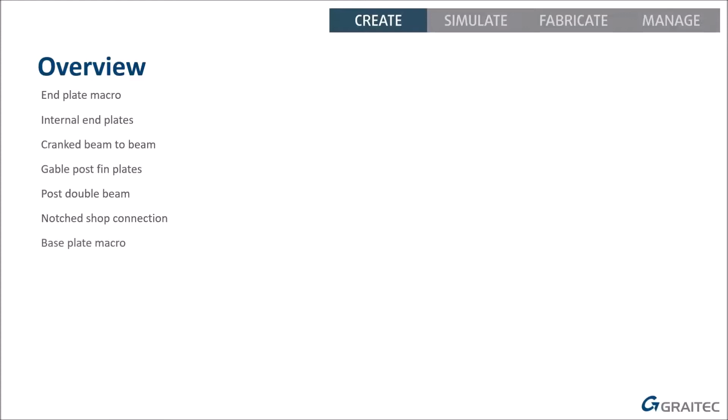I'll talk about the base plate macro. This one comes up quite a lot on our technical support. It's an end plate with bolts just to one side. And then finally, we'll look at what you guys could do with joint names and the propagate joint. So it is some hidden gems.

I have only got now 25 minutes, so we can't show everything, but hopefully you guys, although you're all experienced Advance Steel users, there might be a few bits and pieces that you'll pick up today. And I think this is a session that we can run again in the future, and we can look at other joints. And I will take any questions that you guys have at the end of the session.

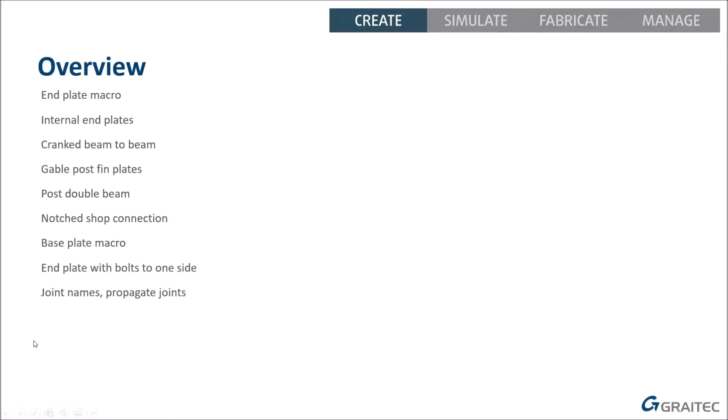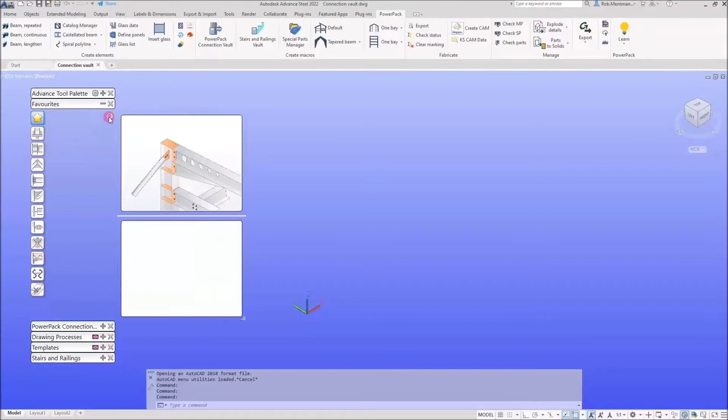Okay, so let's get cracking and actually look at some connections. Now like I said, we've only got half an hour in here. So first thing with your connection vault, you have this little arrow here. Now, if you're not sure what a connection will do for you, this will give you a preview.

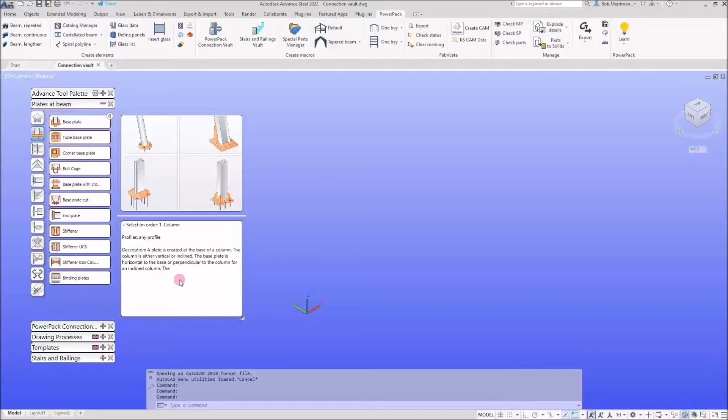And a description of how that connection works. If we look at the base plate, in here, for example, these are the options within the base plate itself, and then it will tell you what selection order you need to click things in, what profiles or what sections it works on, and then a brief description of what it's going to do. So very useful if you're not sure how a joint is going to work.

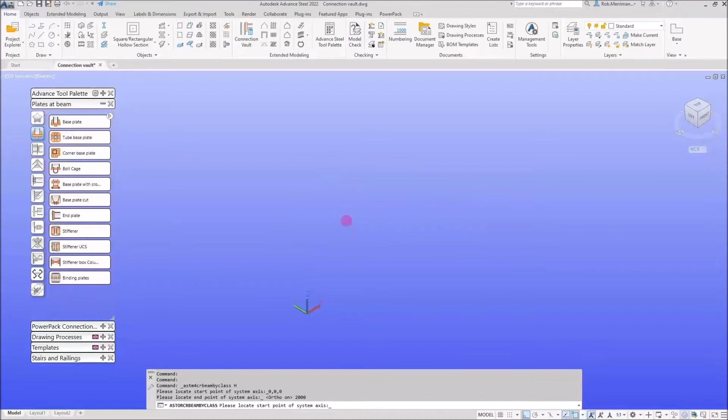I'm going to start with a couple of these you might already be aware of. We're going to start with the box section, and we'll make it, let's say, 2 meters. That will do. We'll zoom back in on that.

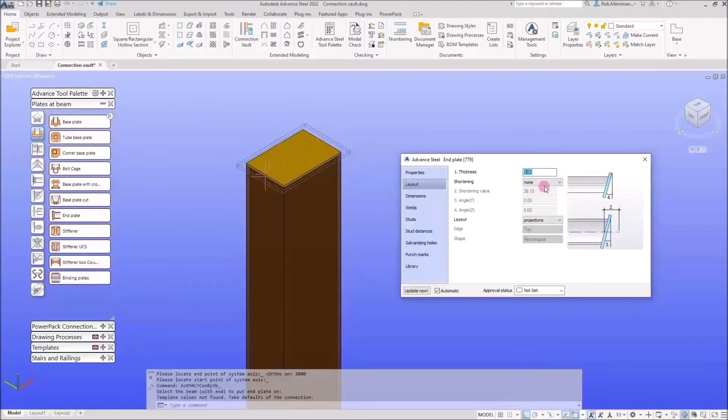Now, if we want a cap plate on the top of this box section, there is a macro in here called an end plate macro. Now, some people think, well, I can just quickly draw a plate by 2 points and put it on there. The things we can do within this joint, we can say, well, let's make that a 5mm end plate. Now, the shortening, I can say shorten by the plate thickness, so I can draw my sections at the correct length and put a 5mm cap, and it will shorten it automatically for me.

Then we're going to set our layout to projections. If I set that to 0 projections all round, that will give me a flush end plate. I could probably set this to a 6mm fillet weld all round.

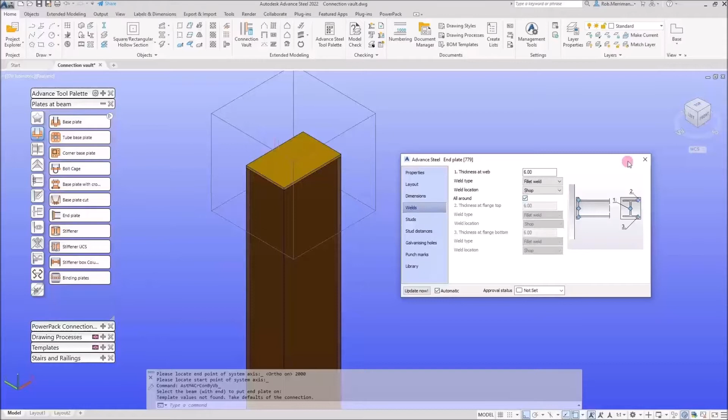Now, the benefit of using this joint over drawing it manually is if I then go and change the box section, or even if I change it completely to a square hollow section, and we change it to something like that, that joint's going to update itself automatically.

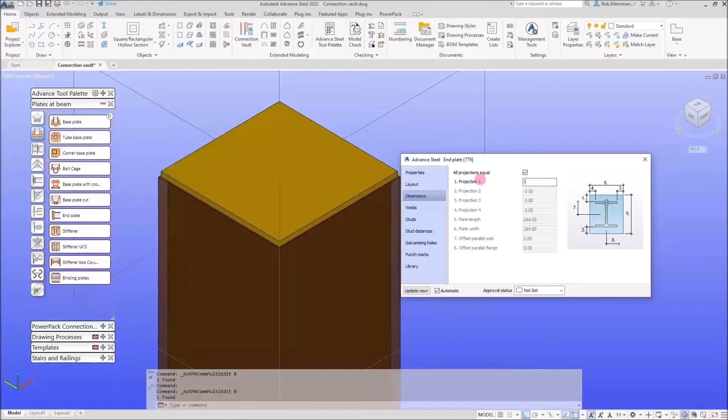Now, we might say, okay, well, fine, well, we need that to be a 10mm box section, and we actually want it brought in 3 or 4mm so we can just run a 3 or 4mm fillet weld around it. Well, that's fine. We can just say in the dimensions -3mm or -4mm. And again, that's going to save that information in there.

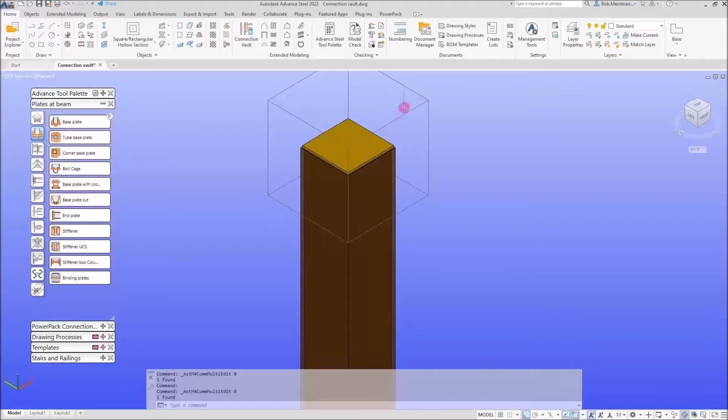So you might think that you can just, and there's nothing, you can obviously draw it as a plate, but putting this kind of information in will allow you to copy things around. We obviously can copy that around to different section sizes, and if something changes, then the plate will update itself automatically.

Now, some people want a plate inside the box section. So let's just make this something a bit smaller, 100 by 10. Now, what we can do instead, we can use this stiffener box column joint. Now, what this is looking at creating is a stiffener inside with backing plates and things.

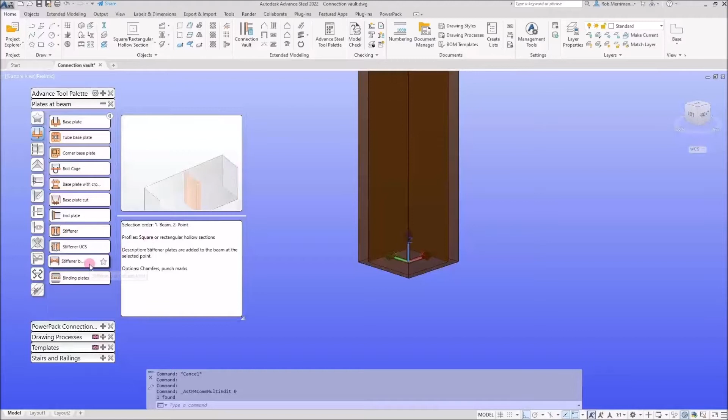So it seems like an odd one to use, but I'll put that in there. And it does look a little bit crazy to begin with. But what we can do for our backing bar settings, I can turn those to none. And we'll keep our plate thickness at 10mm. But what I can do in here, the plate gap, I can set that to say 0.5 or 1mm. For my plate corners, I can put a straight corner on there of, say, 8mm. It's going to be 10mm.

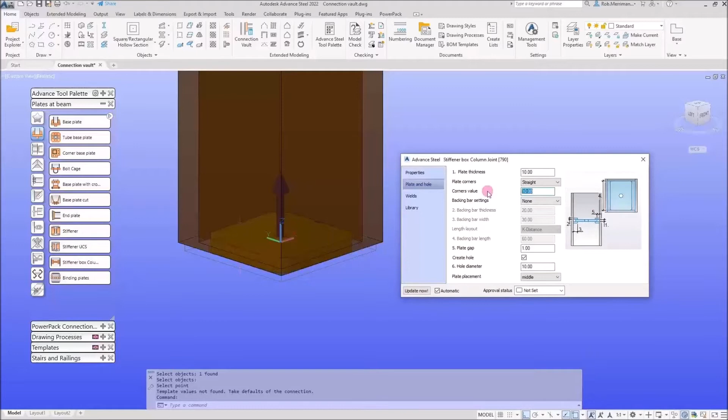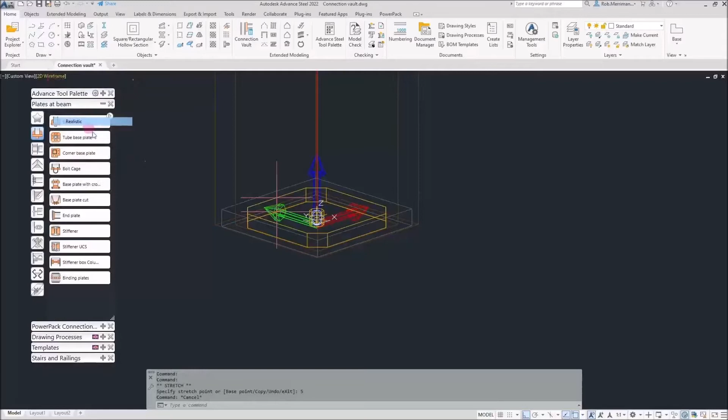And that then, if I want to bring that up so it's flush, I can just move this little grip point. So any joints that have this little sphere, this is where we're inserting a connection. So I can just drag that up and I can type 5mm, and that will, if we go back to a realistic view, that will give me my

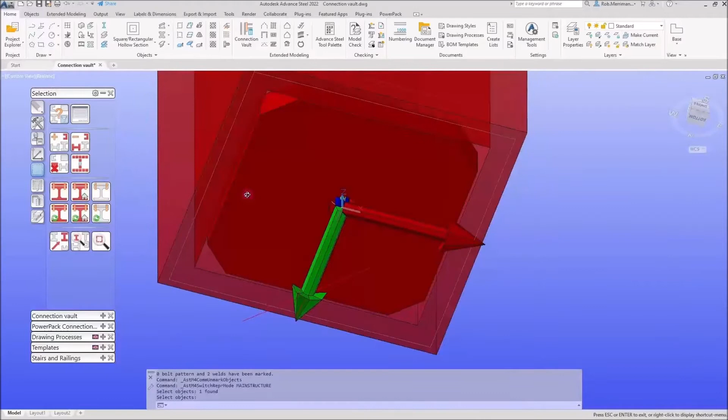internal cap plate with shoulders, with chamfers, and it's welded to the box section. So if we do a clear marking and show me what's attached in here, we can see that's welded automatically. So again, we could draw it manually, but again, if we change the size of that box section, that is going to update itself automatically.

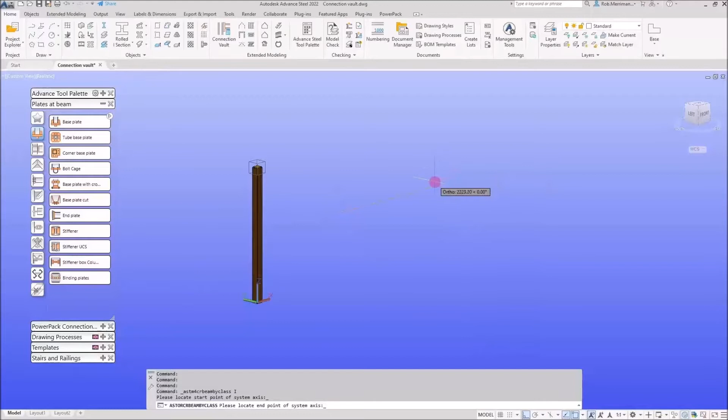Now, while we're looking at this tab, we'll very quickly go through this. Today's going to be a lot of me jumping about all over the place and putting some random things in.

We're going to use the stiffener macro. So you choose your beam object and you choose your location point. I'll just say it's going to be the midpoint in here. That's fine, that'll put a stiffener on for us.

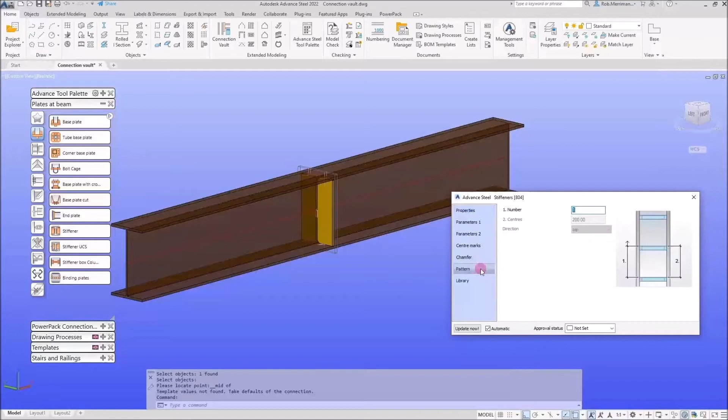One thing people don't always realise with some of these joints is that we can put a pattern in. So I can say I want 5 sets of stiffeners at 200, giving me a pattern of 5 in the direction of the top. Obviously bottom will go the other way, or both will give me my pattern in both directions at certain centres.

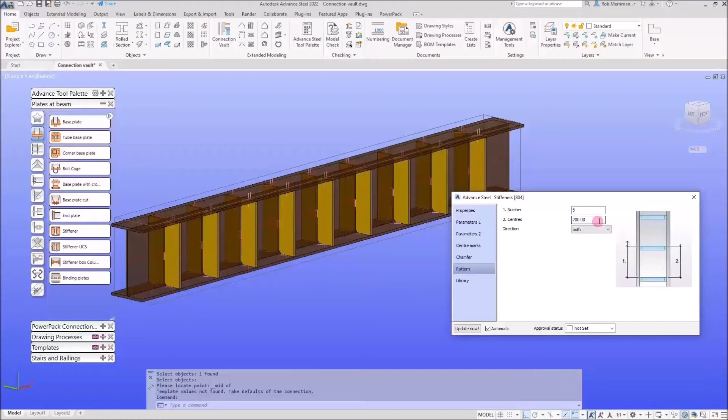So we can do that within the stiffener. We'll have a look at the beam end to end. What I'm going to show you is, let's just put a couple of beams in.

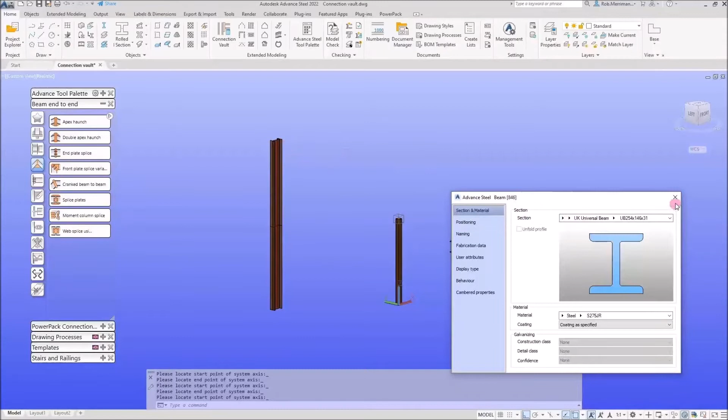Now, let's say we've got a bit of cranked roof steel work. We could obviously just miter these 2 beams, like so, and obviously we need to put a butt weld in.

Now, with that butt weld, it's got to be tested. It costs more to actually do the weld. You've got to test it, and we've got to fully test it.

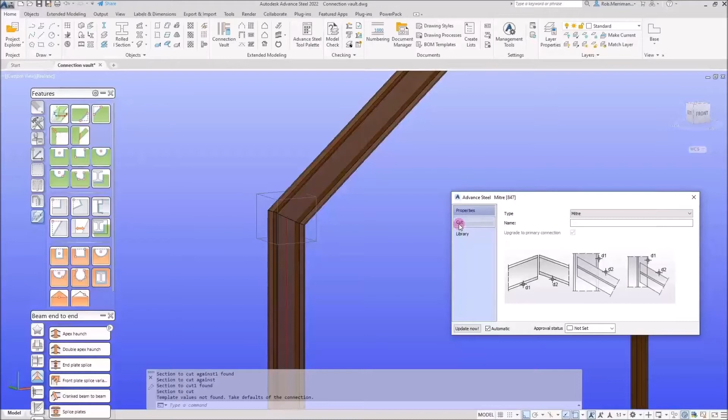Whereas if we did it with a division plate, you can fillet weld either side of that division plate, and then you've only got to test a certain percentage of your welds.

Now we could in here put a 10mm gap in there, and then set our UCS and put our plate in and then weld it. But there is actually a connection in here for our beam end to end.

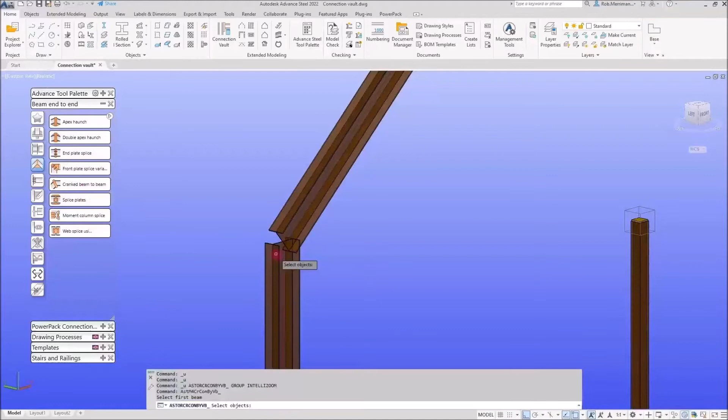We've got a cranked beam to beam connection. So you choose one plate, you choose one beam, you choose the other beam, and that will put the miter on with what I call the division plate.

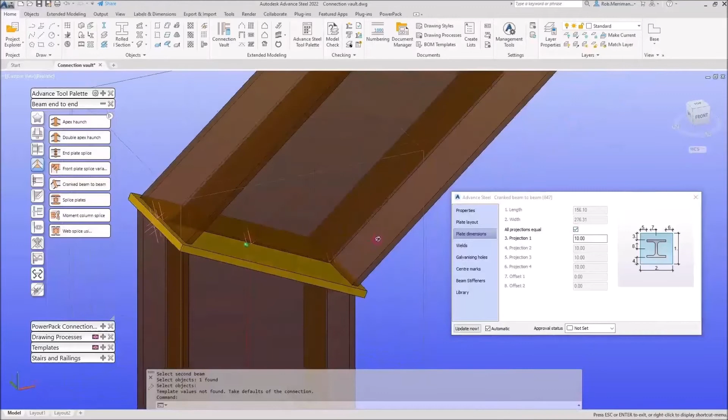So again, the layout is based currently on the projections, but we could change that to total from middle, total from edge, and I could say we'll project 10mm all round, and that'll give me enough room to get my fillet weld in all round.

So quite a simple one. I think you'll all find that today there's nothing groundbreaking in what I'm showing you, but hopefully it will give you food for thought on a few of these different connections, and maybe there'll be some other connections that you could look at for the future.

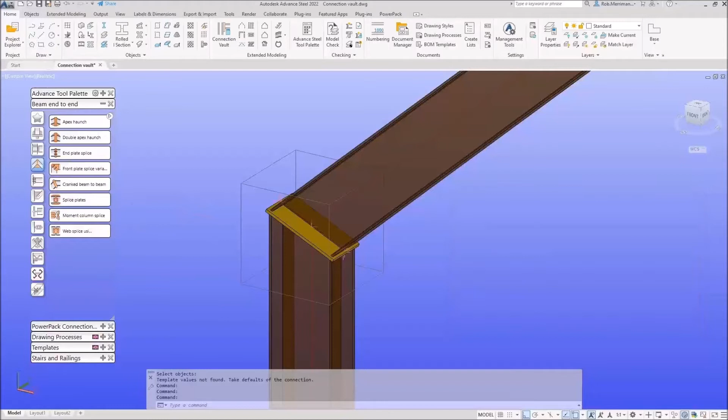The benefit of using these sorts of connections is if I drag this over this way, that is going to update itself automatically.

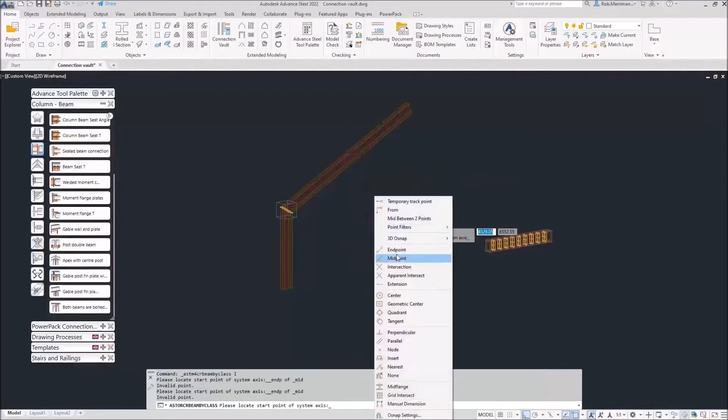Something else we're going to look at in here, and again, I haven't really used this one in the past, haven't used it much, but... my mouse keeps picking the wrong point. That's better. Just going to drop a gable in here.

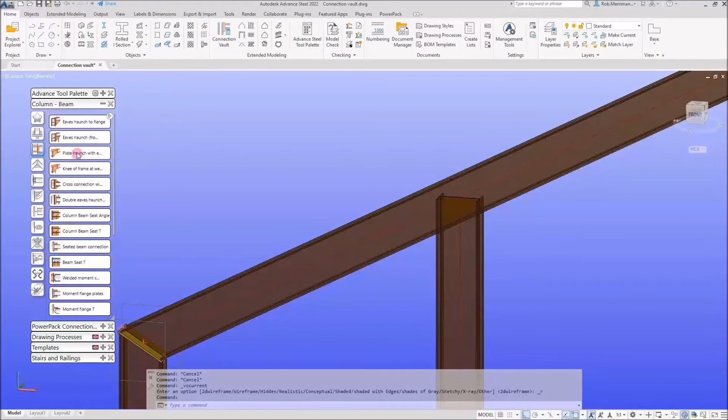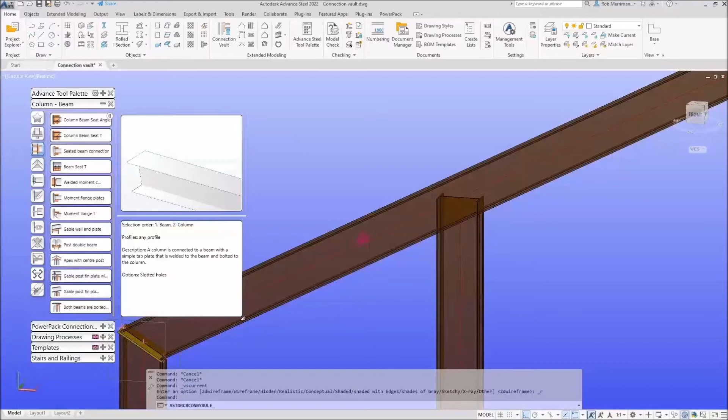we can actually scroll up and down in here. And if we scroll down, we do have a couple of fin plate connections in here for a gable. So we've got gable post fin. So we choose our rafter, we choose our gable column,

and that will put in our fin plate, where we can obviously set the width of the plate, change the side if we want.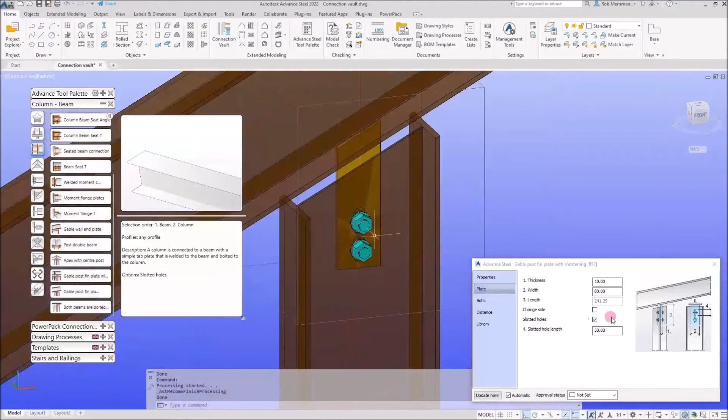We can enable or disable slotted holes, so you've got a little bit of site tolerance in there. As with all the connections, we can obviously set the bolts and the distances.

If you want a horizontal cut in there, we can do that within the macros as you would normally expect to. And there's one with shortening and one without shortening.

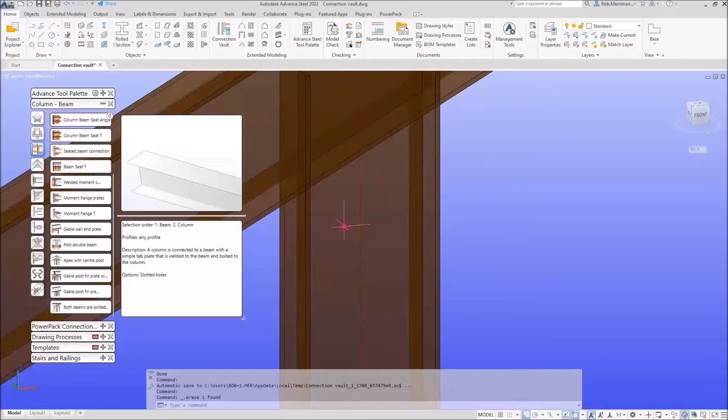So again, not something I was personally fully aware of, or something that we think is used very often. Similar types of connection if we've got a sort of mezzanine structure in here.

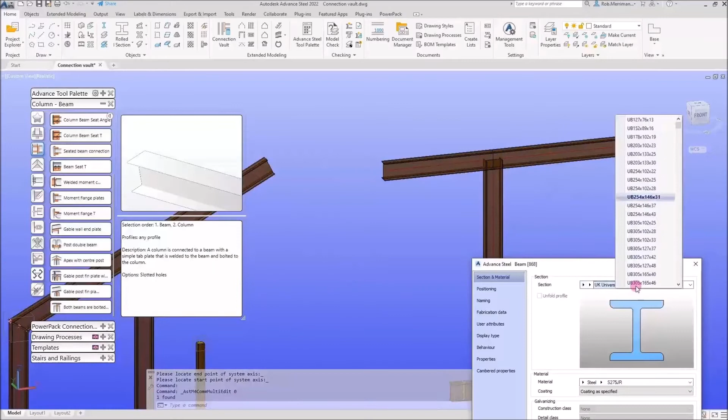We'll just change the section size of this one. What we'll do in here, we'll set both of these beams to the same height.

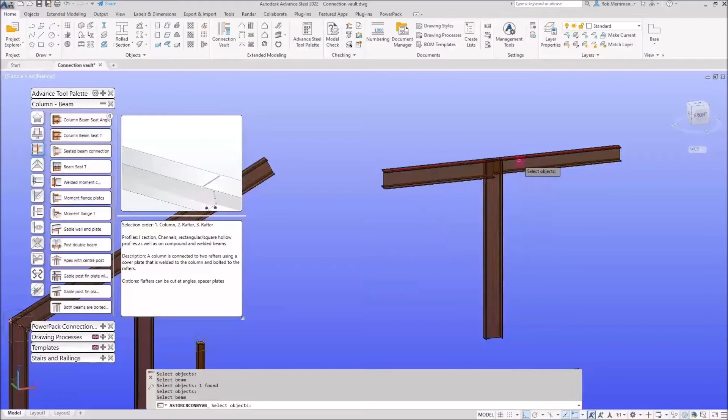We do have connections like this in here, where we've got a post double beam connection. So again, select your post. Always with these connections, look in your command line, select the first beam, and then select the second beam. That is going to put in a single plate on the post, on the column.

And then, because we need it, we've got packer plates in here. It's just a case of working through the dialog to set the plates how we actually want it. For people who do mezzanines, there's quite a lot of these types of connections in the mezzanine, and a lot of people just forget that you can actually scroll down in this palette.

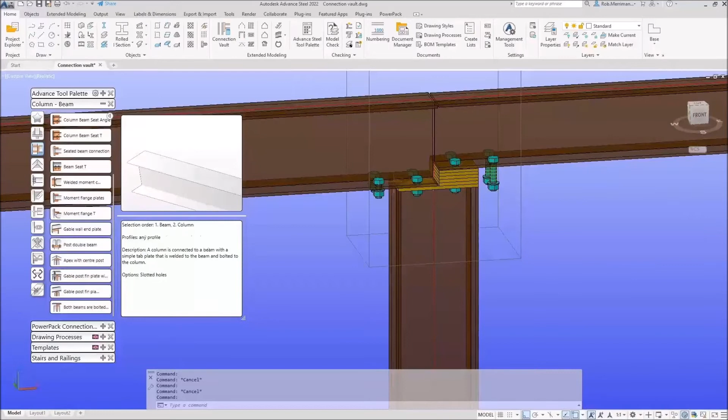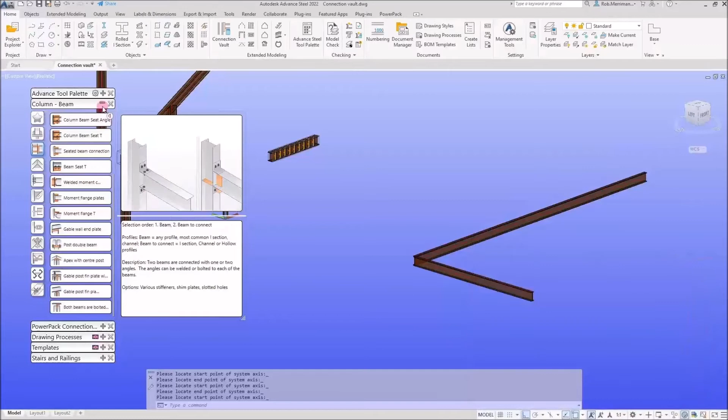So next up, technically this isn't part of the connection vault, but I'm just going to show you a couple of bits and pieces, and this will apply to connections in the connection vault. So what I'm going to do is move this beam down this way. We'll just zoom in on here.

Now, if we want to weld these two together with a notch, we would go to the Features tab on our tool palette, and we would use Parametric Notch Joint. So I choose the two inputs there, and I would go through the dialog. If I want this like a millimeter clear all round, I want to have a straight corner finish in there of say 15 mil.

What I want to do is create a weld, and the one thing with this, this sort of mini connection, is the weld location in here says site. So what we want to do is change that to shop.

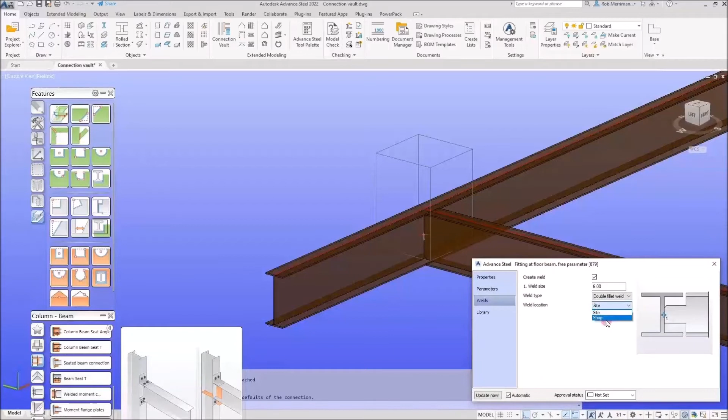Now, before I do anything else, my advice to you guys would be to run a clash check to make sure that we don't have any clashes, and we'll do a show me what's attached in the workshop, because we're sort of doing this manually.

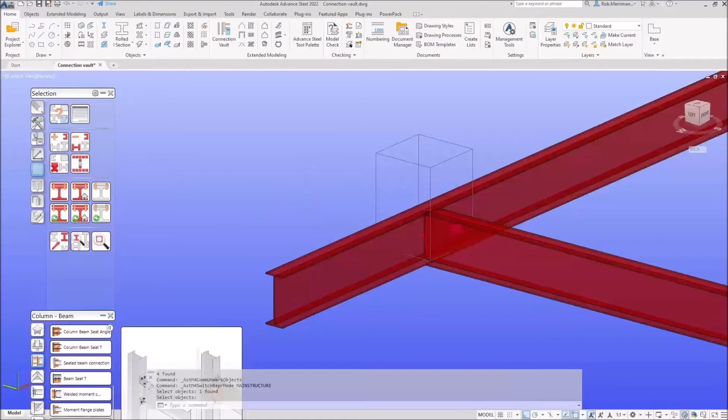Now, if I wanted to use all those settings on every job, every time I put this connection on to begin with, what we can do is on all these connections, you have a library. What I can do is say import values, and that will import the values. Now, it doesn't have a description in here.

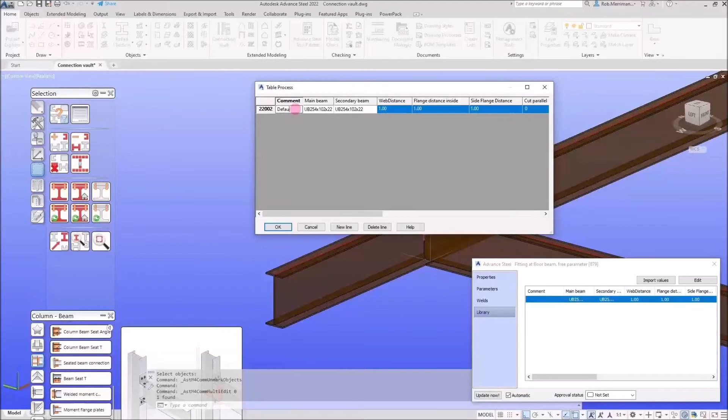If you want your library entry to be used the first and every time, what we need to do, for the name, you want to call it default. And then your entry will be used each and every time.

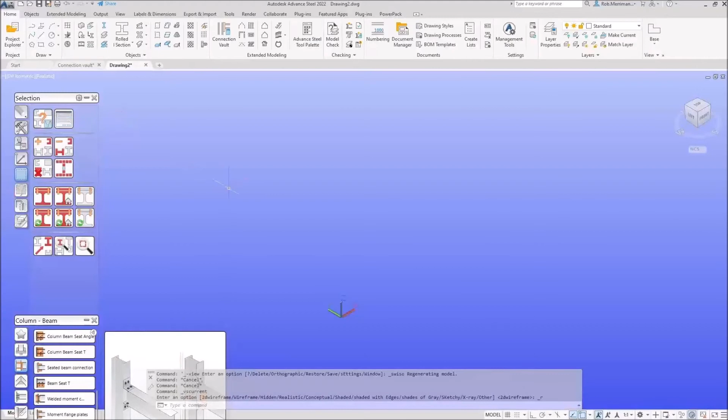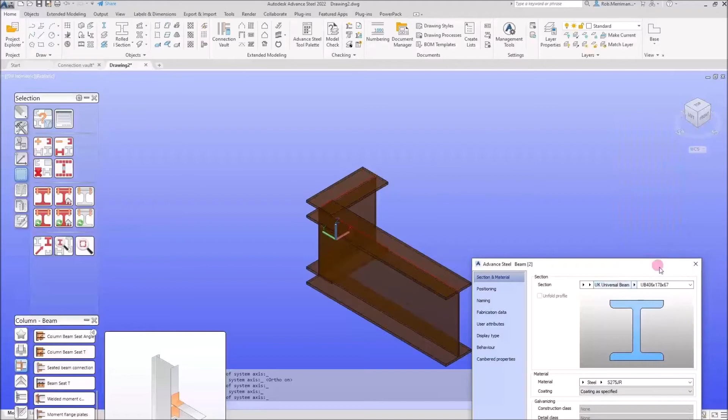So if I go and start a new project, what I'm going to do, and we'll put in some different beam sizes this time. So what we'll do, we'll make them, well, let's make them a lot bigger. We obviously need to just stretch these beams a little bit.

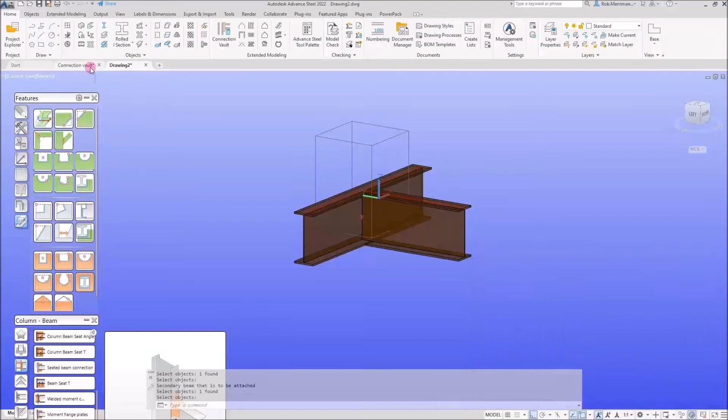But then if I go in here, although this is from the Features tab, that will now, if we look at the parameters, 111, straight cut, and the welds are set to shop, because that is called default. So that's what we can do in there.

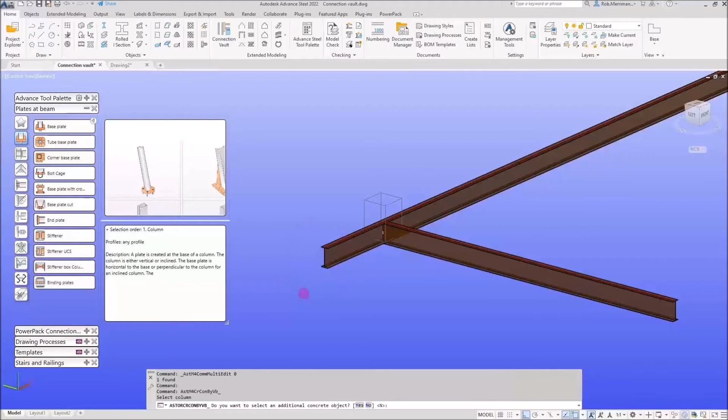Now, just looking at this in here, let's say we're anchoring into a concrete wall or something like that. Although this macro on the plates at beam tab is called the base plate macro, it's basically used if you're anchoring into any concrete object. So I can still use the base plate macro for the end of my beam.

And that will apply that there for me. So yes, it goes on a column, but we can also use it in here if we're anchoring into the wall, for example. Now, I'll just look at the library in here, because I think there will be a default entry on the library.

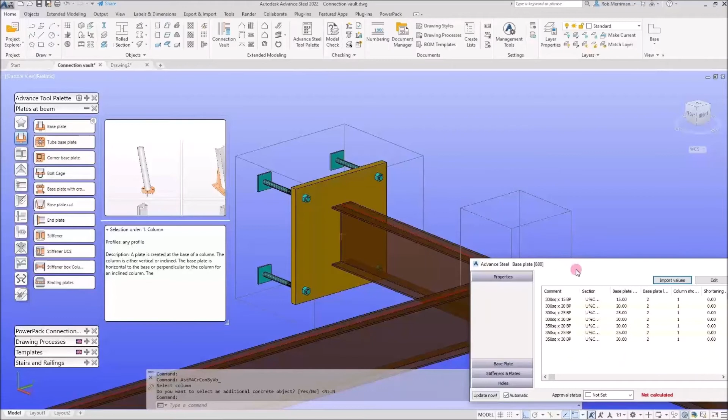And I haven't said that. Of course there isn't going to be. They're all just different sizes. If there is a default, there we go.

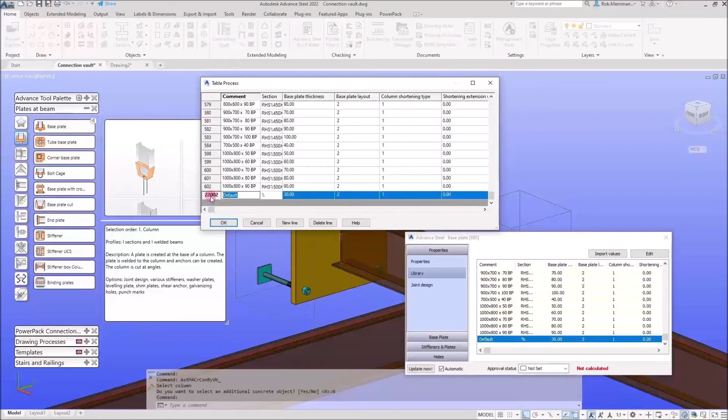Now, if you wanted to add your own default in there, what we would need to do is click the edit button before we brought in our values. So I'd click the edit button. I would scroll down, and you want to look at renaming this default to calling it something else, like default old or an actual descriptive name, and then you would go and bring in your default. You don't just want to bring your own one in and try and call that default, because there's going to be one default that already exists.

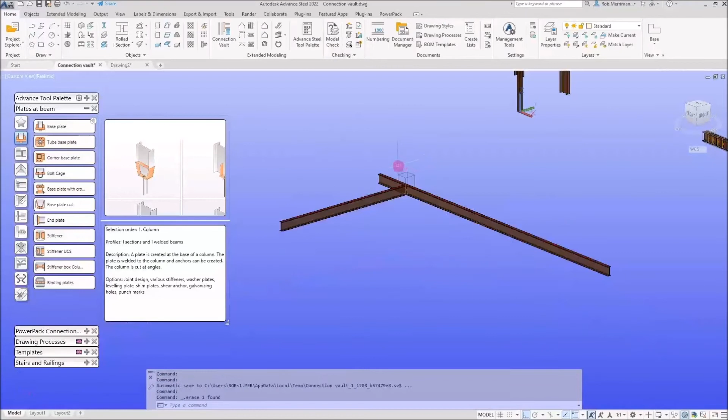Just a little bit of advice for that, as we're looking at the base plate macro. Sometimes you want to put in a base plate macro, say you're connecting into the underside of a slab. Now, what you would do is you would still use the base plate macro. If I click the top of the column, let's see what it wants to do.

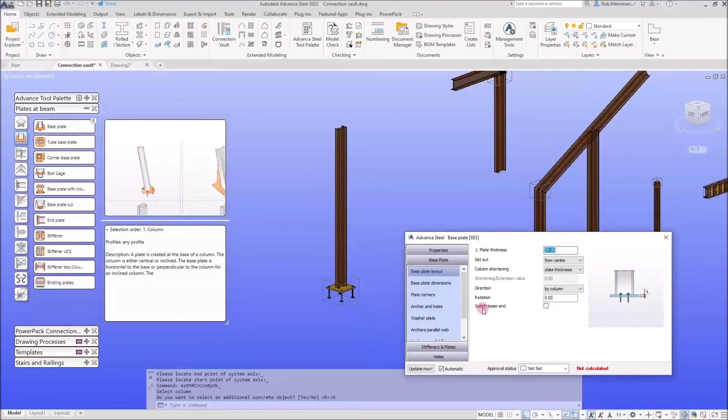Now it's gone to the bottom of the column. So in the base plate macro itself, you've got this little tick box, it says switch beam end. So I can then connect into the underside of the slab if needed. Let's actually get rid of that, otherwise this model is going to be a big collection of random joints.

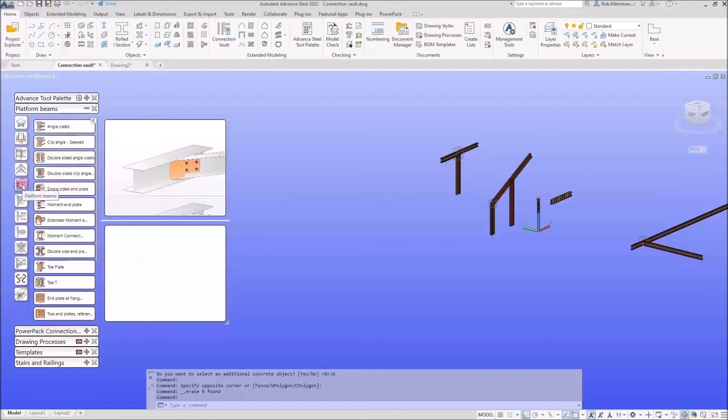We are slowly running out of time. One of the ones I definitely wanted to look at, it comes up on support every now and then. We'll put that in there.

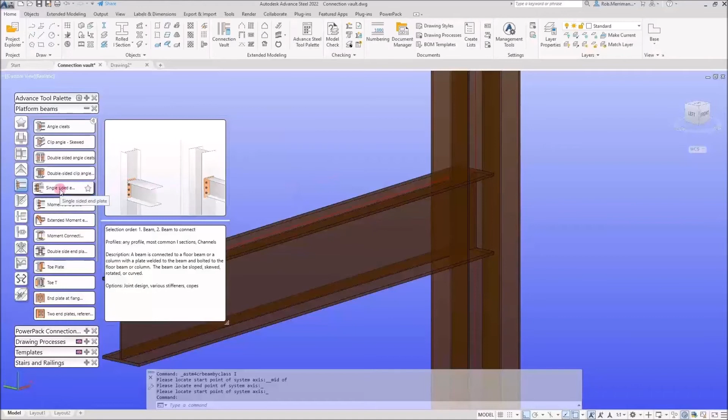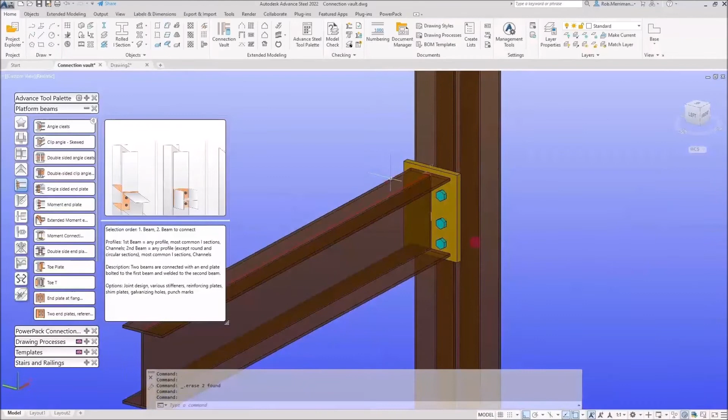Let's say you want to connect this I-beam, but you only want bolts on one side. Maybe you've got an access issue, or maybe you just want 3 bolts. Now, what a lot of people would do is try and use the moment end plate, for example, and then, because you can't control that, delete the macro, and then look to just delete those bolts in there, which is fine. But if someone comes back and makes a change, we've got to then go and actually move everything manually, which is obviously what we're trying to avoid.

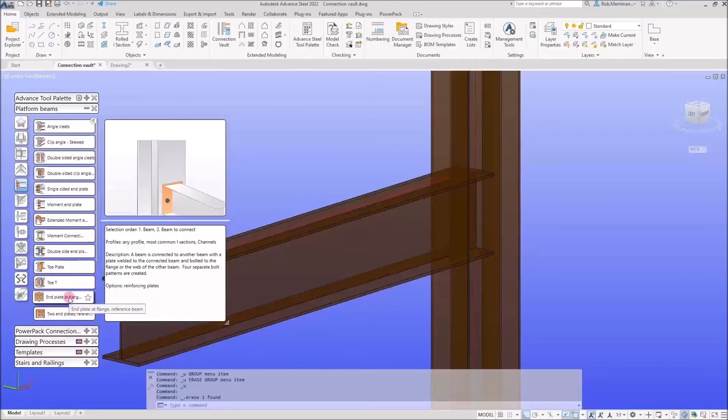So what you can use instead, in the platform beams bolt, we have this end plate at flange reference beam. Select the passing main beam, that's this one here. Select the secondary beam that's to be attached, that's this one here. Now that will put on our end plate with a number of fixings.

But what we can do is, if you have a look in here, we've got an end plate size, so you do have to work out the projections from the actual beam itself. So it does work in a slightly different way to what most people would be used to.

But for the bolts, we can set the bolt diameter. And then in here, we've got these options, bolts 1, 2, 3, and 4, and we can actually set some of these to 0. So it's not bolt number 1, and it's probably, so it will be bolt number 2. I can set bolt number 2 to 0, and I probably, for this example, I will set bolt number 3, and I'll probably set bolt number 4 as well to 0, so that I've just got one dialog, or one tab on the dialog.

And I can say, well, offset to the web, that's 50 mil, offset to the flange, or just for today we'll say, well, 50 is too much, 30 mil, and I want 2 parallel to the web, and I want those centers at 100 or 150, and then I'm obviously going to have to play with my values. It would help if you actually knew what you were trying to do.

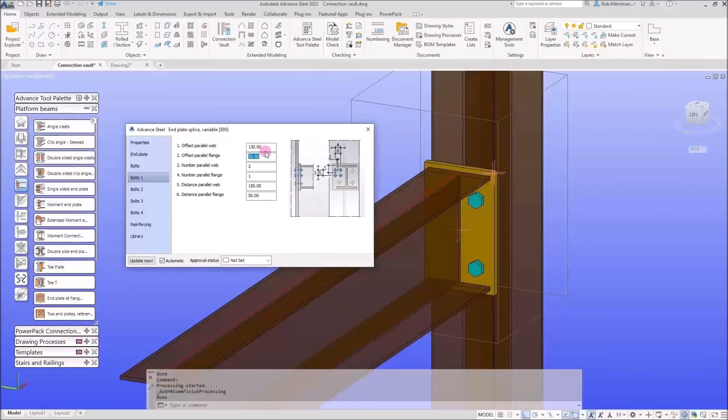But that is how we can have an end plate in there with just 2 bolts. It's still all welded together, it's still all a macro, a connection. So it's worth having that sort of stuff in there.

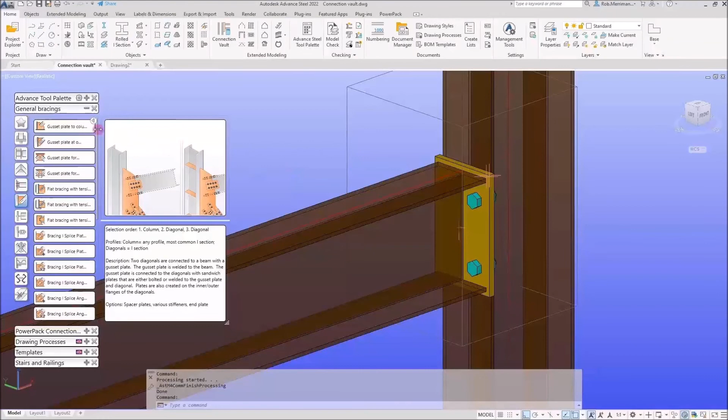Let's see what else we're going to have a look at. I think the last bit we'll look at with the connection vault is actually a few things that we can do with copying around connections and what that can actually do for our drawing.

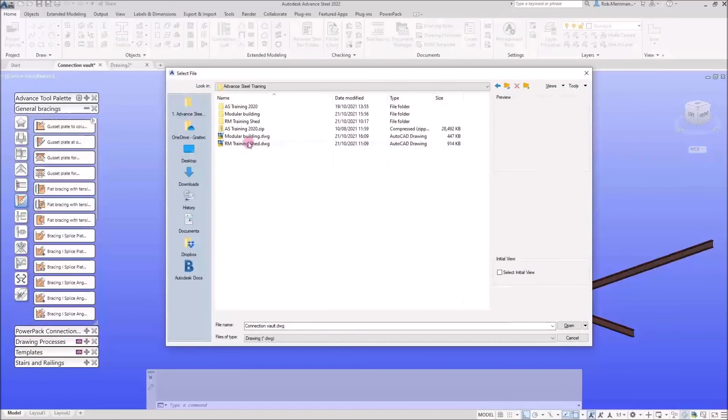So I'm just going to open up our classic Graitec UK training shed. You probably all recognise this by now. I'll just show you a few things that could be beneficial to you with joints.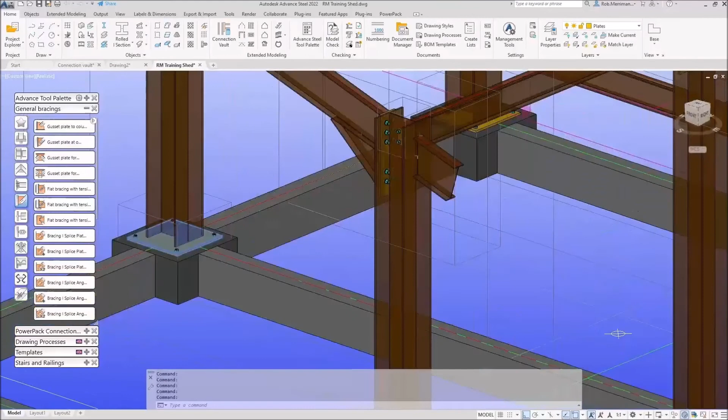Now what I'm going to do, I'm just going to take these base plates off here. We've sort of shown this from time to time. We'll take these off, we'll take this off. Now this connection in here, in fact, I'll take it off, we'll start from scratch. I'm going to put a base plate on. I'm going to choose my base plate connection. I'm just going to say no on the concrete for now.

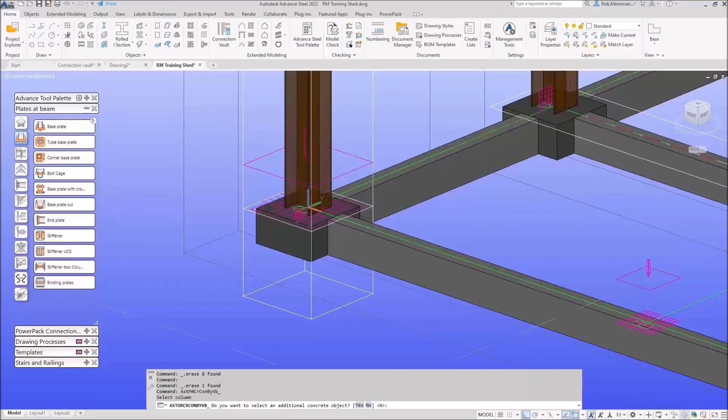Now, all these connections that we put in have a name. So these connections obviously need to be designed by a connection engineer. They'll give you a sheet of calculations, or it'll be on the main contractor's drawing. Someone will have actually designed that base plate connection and called it like BP1 or base plate A.

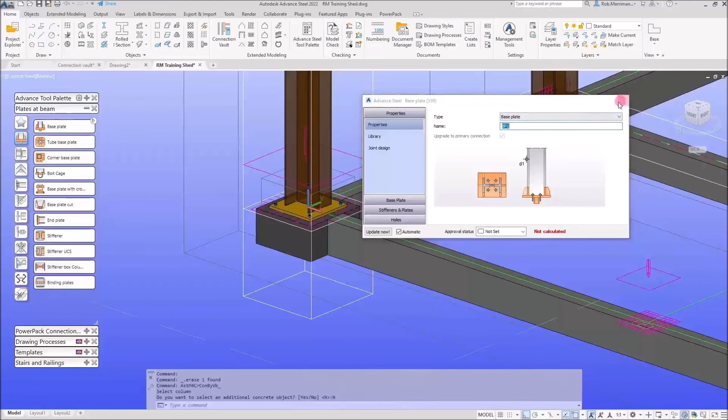So in our name, we can call this BP1. Now if I've got just base plates like this, a single input connection, I can select the joint box, right-click, and choose propagate joint. That will look for sections with exactly the same section size and the same model role. So all these are called column, and they've all got the same section size.

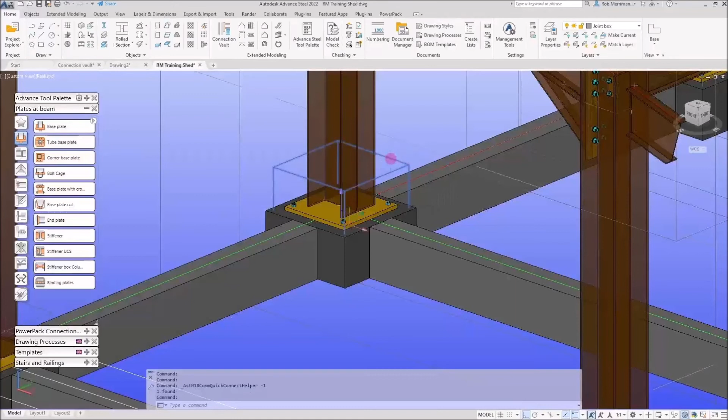What propagate does is it puts the joints in a group. So if I double click on those, they're all part of the group, so I can't change anything. They're controlled by the primary connection. But if we look at the properties, they all say BP1.

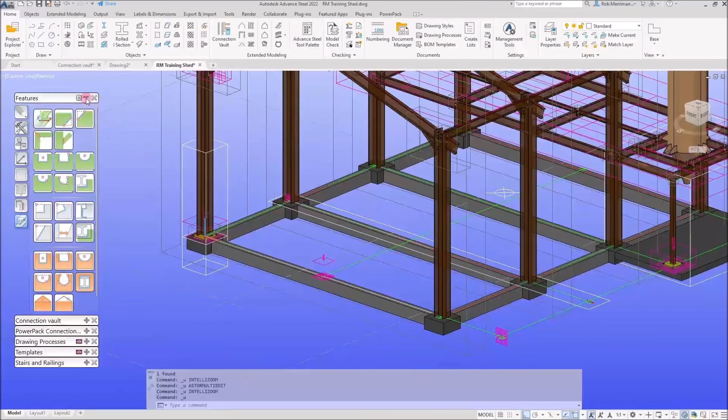Now, this is beneficial if someone else in the office is checking your work, because they can see which connection is which. It's also beneficial just for you if you come back to the project 2 or 3 weeks later.

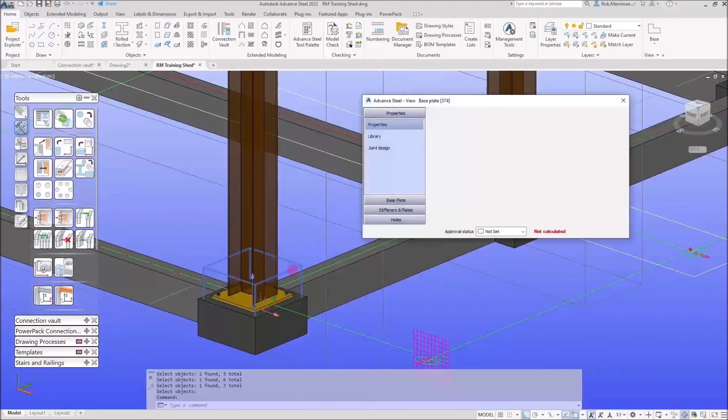Now, if you don't like using propagate, we can just use the joint, create a joint in a joint group multiple, and that will do the same thing. So I can select our columns, and that will put that on there. And they are part of the group, so they are base plate 1.

Now, for our GA view, we're going to run a style called stanchion layout all. What stanchion layout all will do automatically for you, if we go to drawing processes, we'll just run a new camera for A1. Get this running.

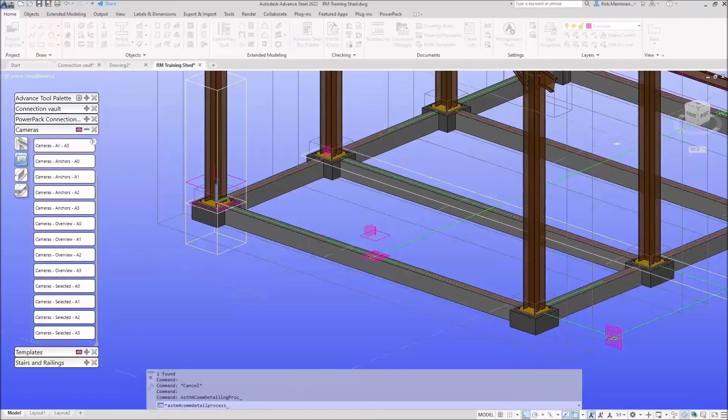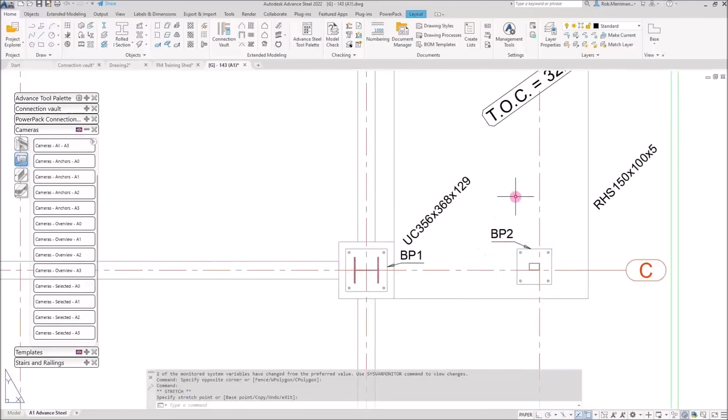If I go and open up this drawing, that particular style will actually label the base plates automatically for you. So each base plate is called base plate 1. That one there I actually call base plate 2 anyway, so it's on there automatically. Different styles will show that kind of thing.

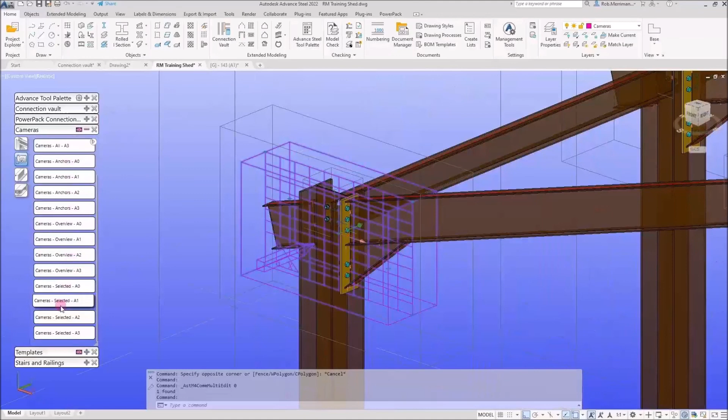If we, for example, called this haunch, might have even already done this. If I go into the haunch, and this is the last thing I'll show you, because my time is already up. If I go call that C1, again, I'll just go and run this drawing.

Or maybe what we'll do, yeah, we'll run that drawing just for now. Camera selected A1. Now it might not automatically show, well, I know in this one it won't show automatically, and this is a blow up anyway. But if we had a whole plan or a whole elevation, you could actually select the plates and label it.

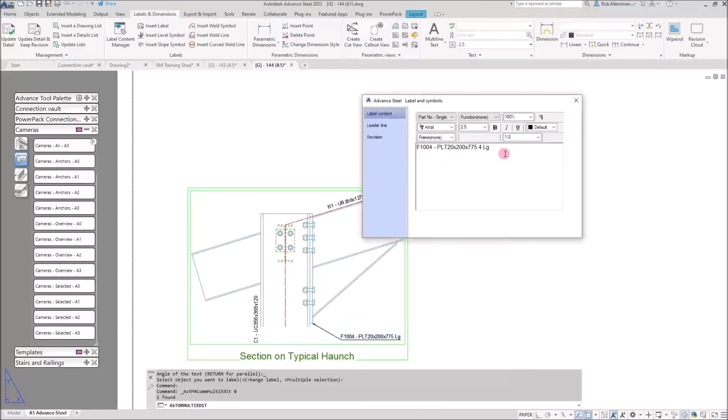And on that one, we do actually have joint name in here, so again that will say C1. So on an overall plan, it can be very, very easy to name your joints if you put that kind of information in the joints.